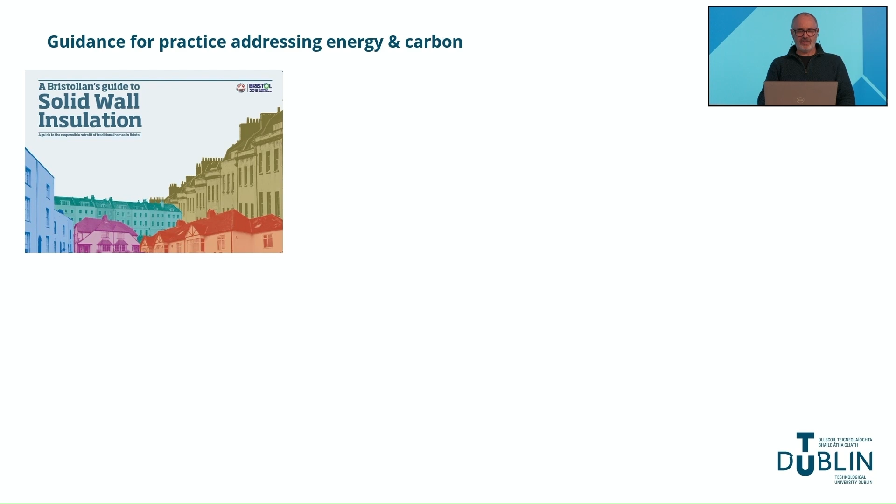This one I love, the Bristolian solid wall guidance from quite a few years ago, but really good guidance for energy efficiency retrofit of historic buildings, what to do and what not to do. National Standards Authority, SR 54, which has been revised a few times and has great guidance in some areas, but maybe not quite as good in others. We've got the technical guidance documents, underpinned by the building regulations. Again, a mixture. How do we navigate these? What's actually being asked for and what's not?

The Royal Institute of Architects of Ireland, Engineers Ireland, other bodies providing guidance from a professional perspective, in this case, sustainable design pathways. We've got the climate challenge from different bodies, the RIBA in the UK, the RIAI in Ireland, Engineers Ireland, all saying we need to do this and this is what we think progress and positive action looks like.

So it's fantastic, it's exciting, it's a bit scary at times, but there's general agreement that we need urgent action and leadership, in this case by architects and the wider construction industry. As professionals, we have solutions and we want to play our part in addressing this emergency and to collectively rise to the challenge. For that to happen, we need to know how to do that.

In all of these cases, those policies and guidance documents will be poorly or incompletely applied if the knowledge and skills required are still uncommon and the means by which professionals can upskill while in full employment are not available, especially given the step change in standards and the limited time available. To remedy this, Dublin Institute of Technology and now Technological University Dublin innovated back in 2011, again in 2015 and again in 2017 to create programmes that met those gaps and addressed those shortfalls in knowledge.

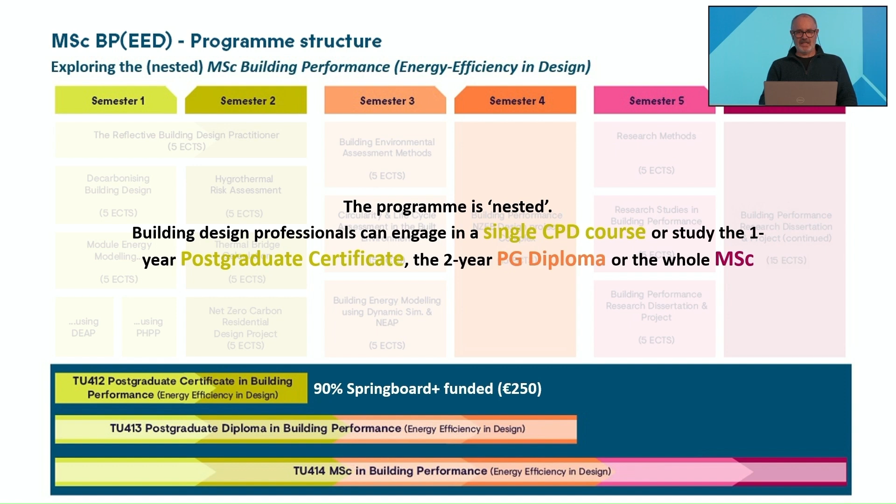At the moment in 2025, there is Springboard funding, and there has been for a number of years, which is a 90% subsidy from the government, which is an extraordinary investment by the state in your upskilling. Right at this moment, I can't guarantee that that will continue, but it's obviously our ambition to provide that subsidy where we can. So if we look at that program just briefly across the 3 years, you can see a range of modules across, and I'm going to go through each of those right now.

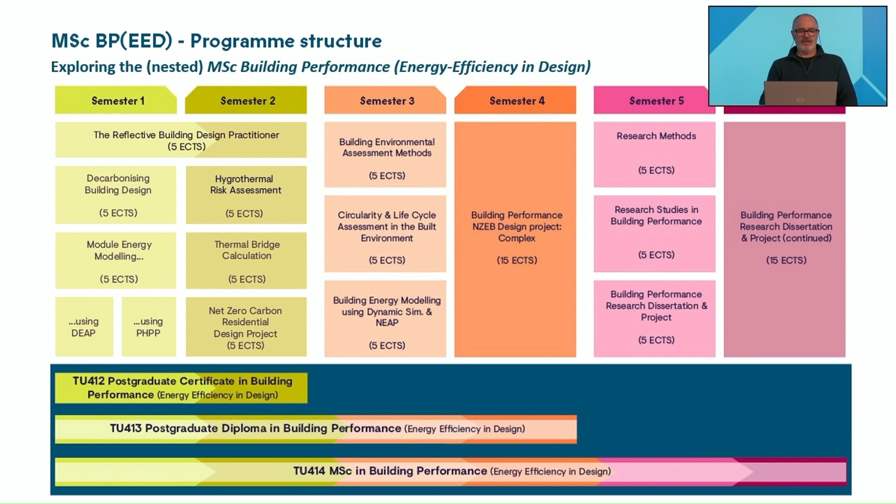So if we start at the first module, Decarbonising Building Design, it's this module here. It takes you through an engagement with where are we in society, what's going wrong, what's changing, where the issues are, where the policy responses are, both at the level of the United Nations, the EU and Ireland. What are the technologies that can help us engage and address that?

And then the technical skill that we teach in that module is around plane element calculation, basically U-value calculation, and an introduction to thermal bridge calculation and so on. But broadly, it's a policy and technology focused module that brings you into the space of the overall picture of where we are and where we need to get to.

One above that there, Reflective Building Design Practitioner, is a module that goes through the whole year and encourages people to reflect on their own learning journey, look at their own house, look at their own practice, and learn from the decarbonising building design practice of other professionals. So it's an interesting exploratory module.

Going further, you then have 2 electives. You've got 2 options. Building energy modelling using either DEAP, the Dwelling Energy Assessment Procedure, which is the statutory tool that's referred to in Part L of the building regulations, and is required to be used for new build buildings, and then is used to guide compliance and grant aid for the retrofit of domestic buildings.

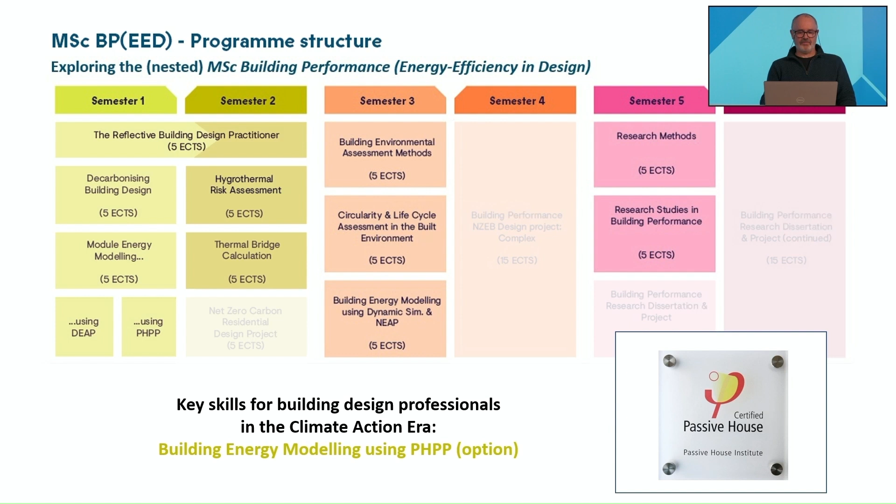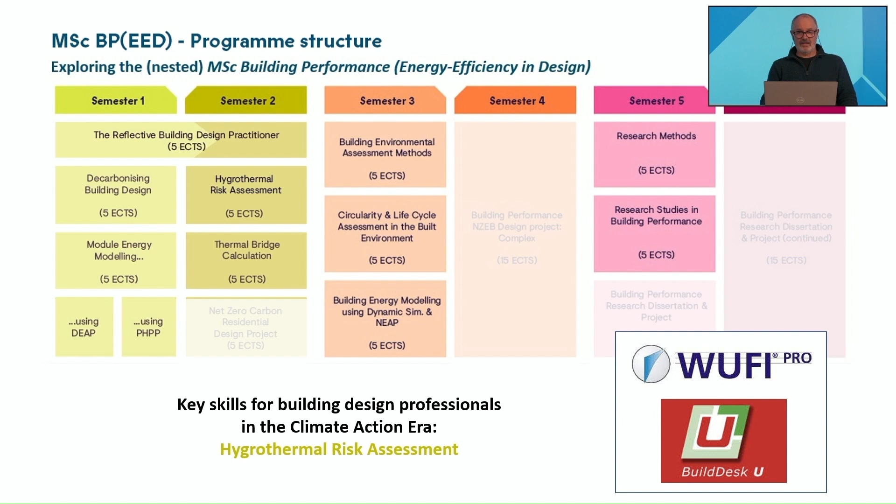The next, coming after Christmas, Hygrothermal Risk Assessment, we teach 2 tools. BuildDesk U, which effectively relates to the dew point method, the Glaser calculation, to put it briefly, which is quite common. It's the main tool for moisture risk assessment in the world, but it is very, very limited. And therefore we teach WUFI Pro, which is a significant improvement, both in accuracy and allows proper parametric risk assessment for both new build, retrofit, every type of building and so on. So again, we provide access to the software, standards, etc.

The next tool we teach is called Mold Simulator. So this is a thermal bridge calculation tool, which teaches 2-dimensional thermal bridge junctions. So the junction between plane elements, how a window meets a wall, how a wall meets a floor, and the extra heat loss that can occur at those locations and any moisture risk associated specifically with those junctions. So really useful, and has helped people in the past move forward and join the National Thermal Modelers Register, even though this is an introductory module.

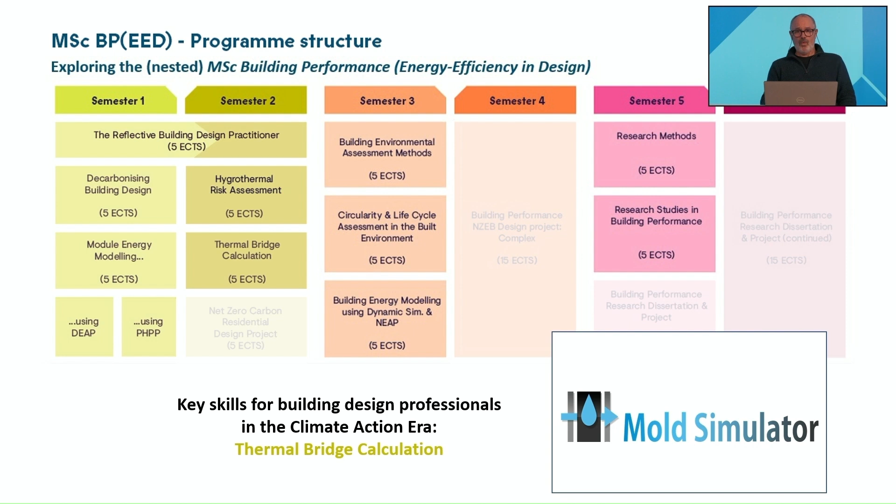It's not a module of the scale associated with that, but I know some people have come through and been able to take advantage of that. But like all these other tools, they're tools for technical design offices, architects' offices, building designer offices, where they need those extra skills without necessarily becoming a specialist. So that's first year. Moving into second year, building environmental assessment methods, where we're learning HPI, the Home Performance Index,

which was designed, created by the Irish Green Building Council for residential buildings and mostly apartment buildings, but it can be for housing estates, etc. And it's occasionally used for retrofit. And it addresses that wider concern about, is this building in the right location in the first place? Is this neighborhood walkable? Water supply, biking space for parking your bike, access to facilities to clean your clothes, a whole wide range of environmental concerns, including embodied carbon and operational carbon and energy, of course.

And then LEED, LEED Platinum, LEED Gold, etc., is the tool that we use for non-residential buildings, and that reflects the importance of foreign direct investment in Ireland. So both of those tools are taught in a single module, Building Environmental Assessment Methods. Quite excitingly, we then teach a module on circularity. So building circularity, how we can keep buildings, building products and building materials in use for as long as possible through repair, reuse, refurbishment, repurposing, remanufacturing, etc., and thereby have as low as possible an impact on the planet. So One-Click LCA is a life cycle assessment tool that enables us to do that.

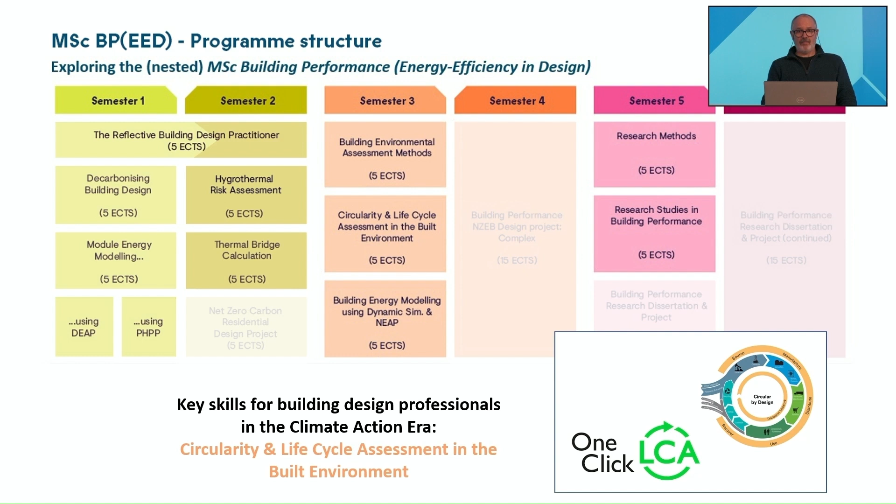And then we also teach building design for circularity, which is a fascinating new emerging area as to how to actually technically specify buildings and particularly consider those junctions and how those materials come together such that they can then come apart better, to improve the ability for us not only to recycle materials, but also to reuse products and reuse components as much as possible. And thereby, minimizing environmental impacts. So very exciting module that.

And then dynamic building energy modeling using dynamic simulation and the non-domestic energy assessment procedure, NEAP. For this, we tend to use DesignBuilder, and through that, we have access to an SBEM interface, which is used for NEAP. So this again allows us to look at overheating, air quality, comfort, daylighting, a range of concerns, and some amount of ventilation focus, to overcome some of the concerns that, for instance, other tools don't go as far as overheating. And as we know, as buildings become more airtight, more insulated, concerns about overheating and comfort are coming to the fore to a greater extent. So dynamic modeling can allow you to do that, and DesignBuilder is an excellent tool to do so.

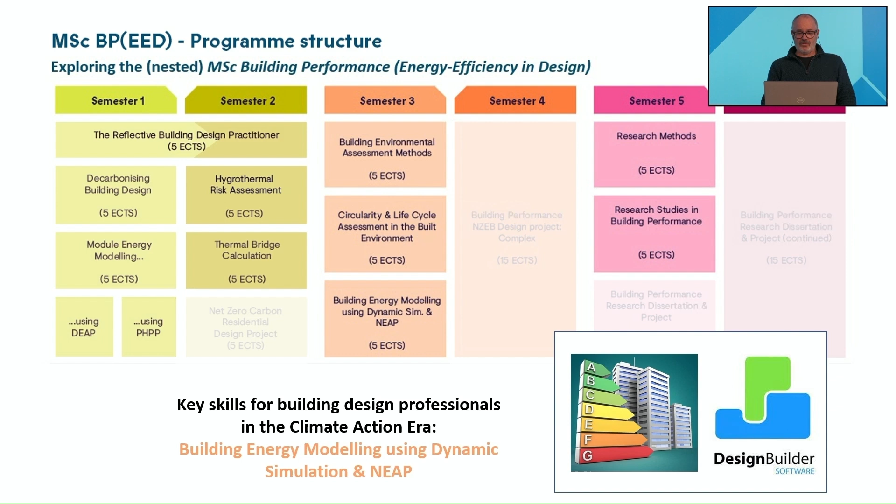So that takes us to the end of the 3 modules in second year, and then we move to the big project at the end of second year. So if we look at this slide here, you can see how there's an end of year project in first year. There's a much bigger end of year project in second year. Both of these are very much based on real buildings. They could be residential, moving on to non-residential or otherwise. That can change from year to year. And then in third year, you're moving on to a thesis, which begins at the end of semester 1 and moves on into semester 2. And really that's beginning to move into that kind of personal research question, that itch that you need to scratch.

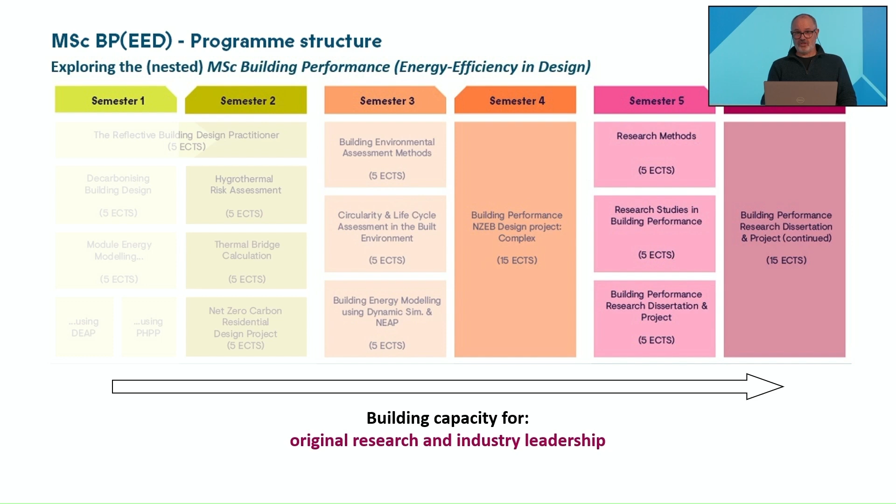But certainly it's the first 2 years that we'd like to really encourage most building design professionals to engage with. The first year might be subsidized, but the first 2 years really complete that technical upskilling, that transformative technical upskilling that we're so passionate about. The next thing to say, obviously, is also that as you go through the 3 years, your capacity to do research and to lead in industry is also increasing.

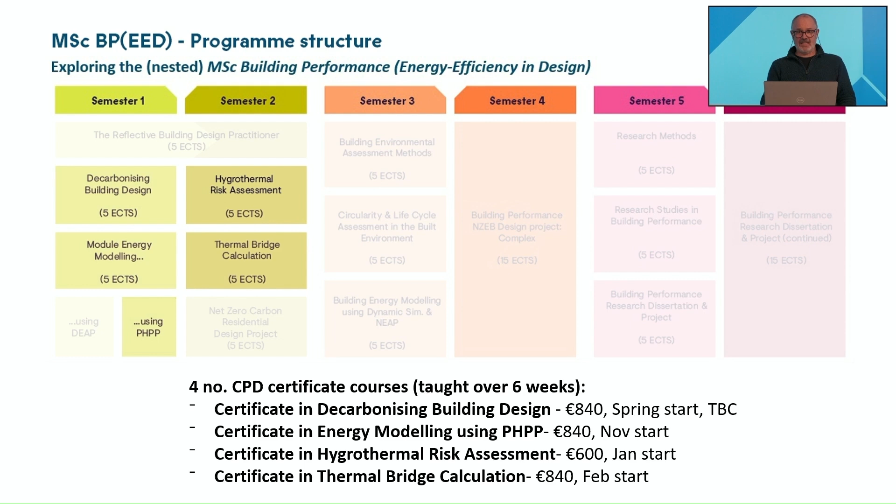Finally, just to say that there are CPDs. At the moment, it's 3 CPDs, but it may be growing to 4 CPDs, or micro-credentials, to use emerging language, where over 6-week periods, a building design professional can engage in one of these modules and significantly transform their skills in that particular area. All of this is obviously provided online and is very, very accessible, as well as good value. There's obviously more on that on the website.

So by providing the lecturing content and then giving the students access to discussion boards and to webinars, and of course then there's two small exams and there's a completing project in the typical 6-week modules, you're getting really fantastic deep learning that's provided with excellent feedback.

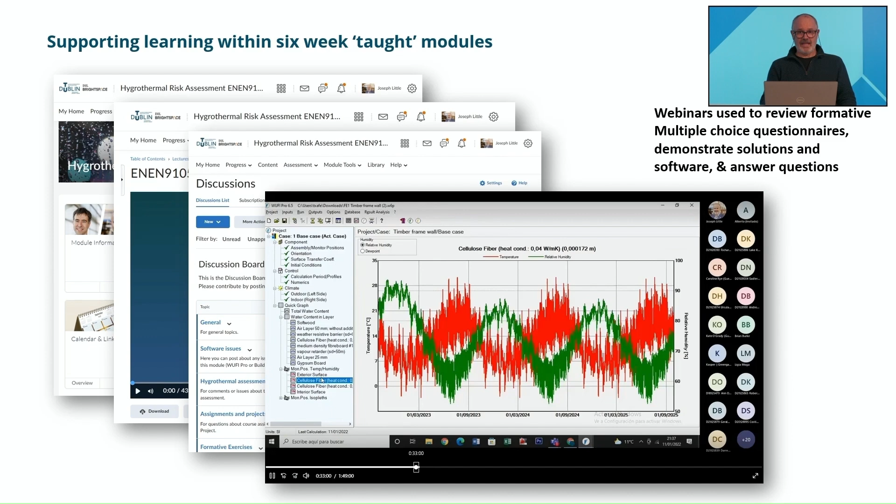On the Tuesday then of that week, there's a webinar where there's a live demonstration of the questions you were being asked, which might include review of the use of a particular simulation tool or some knowledge. Your questions can be posed and answered and so on. And then that happens again in the second week. And at the end of that second week, there's a small multiple choice questionnaire, again in the evenings. This is all happening typically in evening time to reflect fully employed participants.

And there's a multiple choice questionnaire, which may or may not include the use of a software tool, because there's a lot of technical software tools that we're teaching over the year, the use of them, the standards based use of them. And then that's reflected again. We go back to that pattern for week 3 and week 4. So you've got the second exam. The first exam is looking at the first 2 weeks and the second exam is looking at the next 2 weeks. And then we move into a project mode.

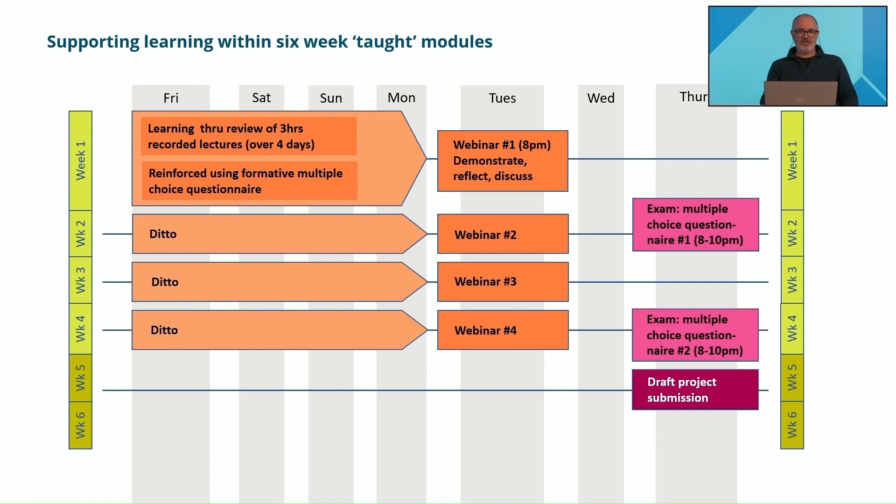So we've provided a brief to you to challenge you, and it's the blank sheet of paper, which is often a different thing, to use the analogy, rather than saying one of these 5 answers is right, which one is it? So it's challenging your knowledge in a different sort of way, based on a brief. The project is a full week given. In fact, students can start earlier if they respond to the brief beforehand. They then submit a draft unfinished submission on that Thursday of the 5th week.

And then the following day, which in this case is the start of the 6th week, we then come online for the afternoon for a feedback session where we look at a range of different submissions that have been made and draw from them what's positive, what could change, what's really exciting, deepen the understanding of the brief through discussion about that and so on. And we give people pointers to how they might finish their project, and they've a further week to do so.

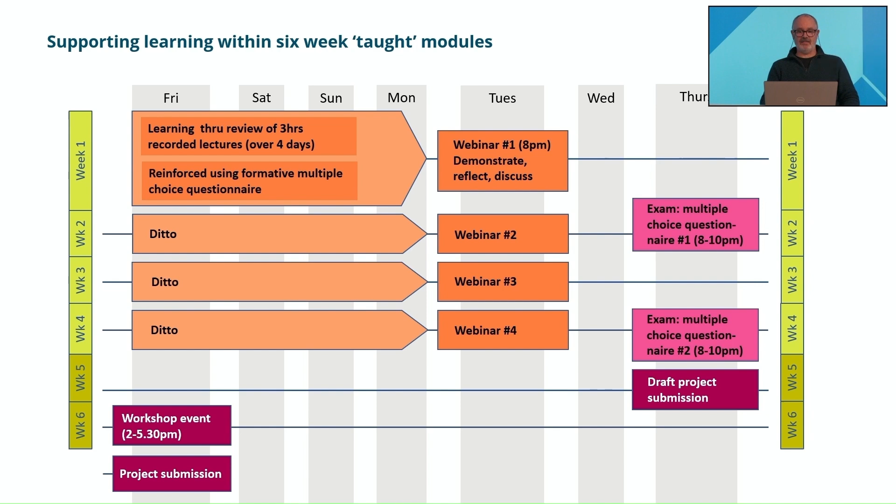And then, as you can imagine, whether it's the following Friday or even maybe the Saturday or Sunday, if we give an extension, people have got that extra time to finish that project, ensuring that you've got the really best project you possibly could based on really good feedback and time for reflection. We then grade those and we give further written feedback on those projects. So really over the 6-week period, plus that additional feedback, there's a really excellent opportunity to gain a significant boost in your technical knowledge and application of this area of calculation, simulation, technical design. And there can be student gatherings at different stages.